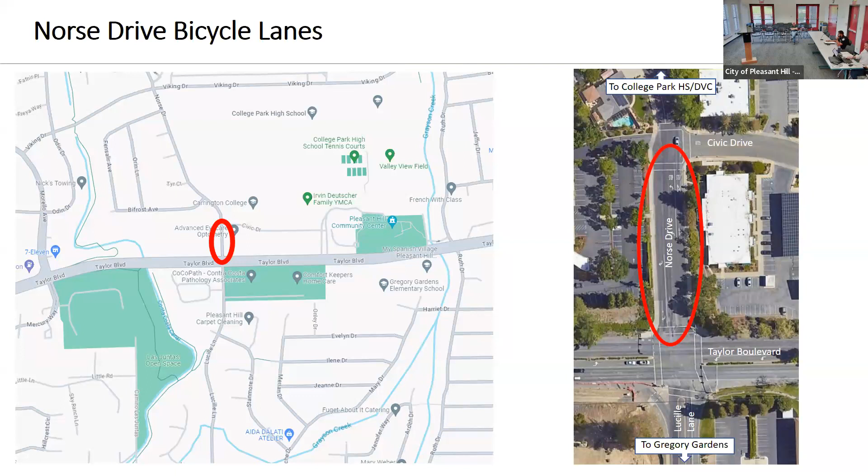So the existing cross-section today, looking north on Norse Drive immediately after Taylor Boulevard, is divided into 4 vehicle lanes: basically a right turn lane going southbound that lasts the entire length of the block, a shared through-left, and a northbound left turn lane that goes the entire block and turns into the office park. There's a signal at Taylor, and at Civic Drive it's an all-way stop, with a through lane that also goes north.

Both of the 2 outside lanes are fairly wide at 14 feet, so there is some room that we had to play with here. Looking at how this could fit a bike lane, we drew up some cross sections. This shows basically trading off the right turn lane going southbound for the left turn lane going northbound, which frees up a lot of space if we only have 3 vehicle lanes. As it approaches Taylor, it would still have a right turn lane but just a single northbound through lane, and then we can fit buffered bike lanes in there.

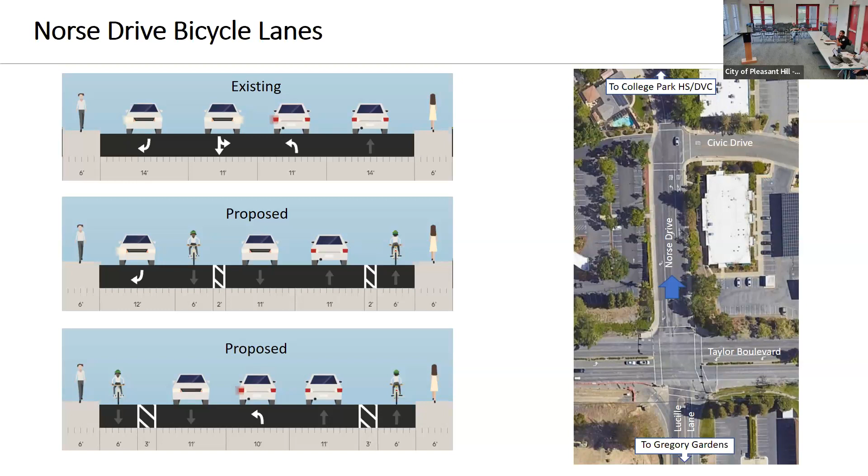As you get closer to Civic, you lose the southbound right turn lane and pick up a northbound left turn lane. Now this obviously doesn't line up perfectly, so what this ends up looking like is this -- the green highlights the bicycle path in there.

So to the left -- sorry, this just got flipped, so north is going to the right now with Civic on the right side and Taylor Boulevard on the left. This is the striping currently proposed on Lucille: a bike lane coming up to the intersection and also going southbound. It lines up pretty well across the intersection, but you can see there's only a single left turn lane going through across Taylor, so there was no reason to have 2 receiving lanes going northbound on Norse Drive.

Things shift over to still provide the left turn lane into the business at Civic Drive, but a much shorter turn pocket that's more appropriate for the amount of vehicles turning in there. Right turning vehicles onto Taylor Boulevard, coming southbound, cross over the bike lane -- again highlighting that conflict zone in green -- and then turning right onto Taylor.

So this was a layout that worked out pretty well to use up a lot of that extra vehicle space, which was a lot of excess capacity, and to get facilities in there that tie in nicely to what's happening on Lucille.

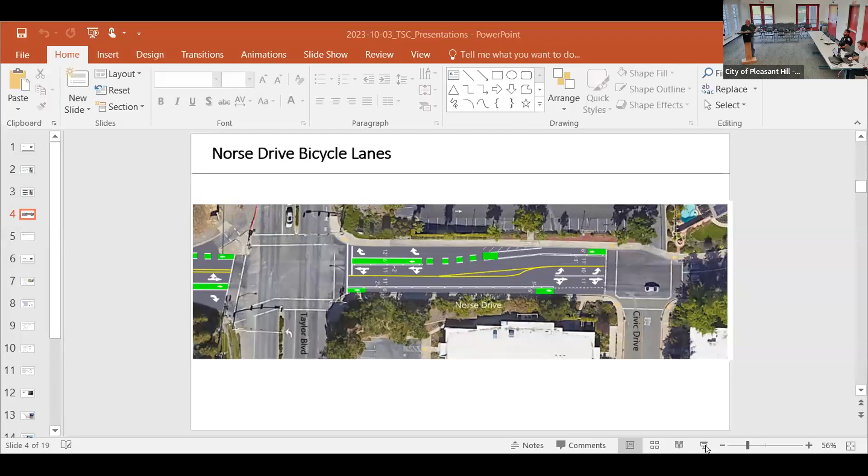Good afternoon again. I'm Jack Prosek. I was the one that submitted the overall idea of making these modifications, although, can you put that back up, please? Brian's plan here is a little bit different than what I envisioned in my mind. I'm a civil engineer, but not a traffic engineer, so.

First point is on Lucille Lane. I thought that green area zone extended across both the through and the right turn lanes in the plans for 401 Taylor. I believe in the latest plan, that's not the case. And the reason was that having it extend across the right turn lane was going to be somewhat confusing for drivers, in terms of where they should stop. I worried about that too, and that's why I made a point about the education, because you created a whole waiting zone there for bicyclists across all three lanes, according to the drawings that were approved by the planning commission and the city council. So I'm surprised to see that change.

One of the other oddball things that happens right now is because you have two northbound lanes on Norse Drive, when vehicles are turning from eastbound Taylor onto Norse, normally they should turn into the nearest lane. But all too quickly, that nearest lane turns into a left turn only lane. And in my mind, if you ever go out there and you watch, you can tell the people who have driven that route before, because they all go immediately to the right-hand lane.

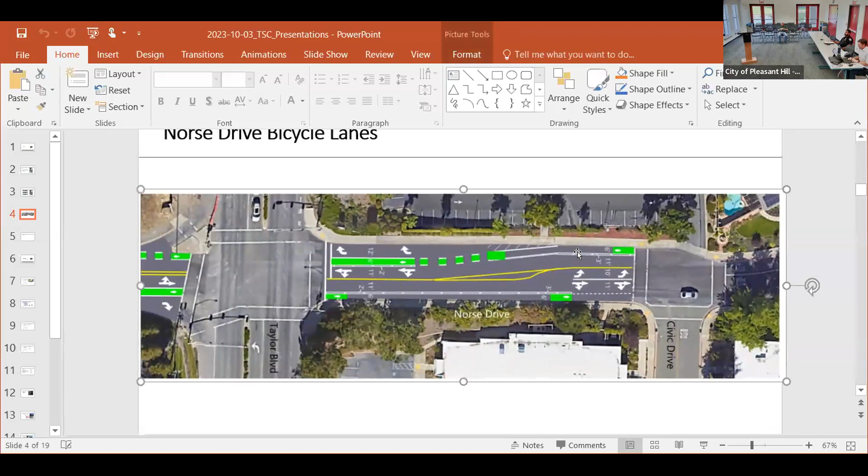One other thing just came to mind - this gentleman started talking about the bike lane. The design is, can you put that back? Sorry Ryan, I'm looking at it, and that wide green area - was that also intended for bicycles to make a left onto Taylor? I started wondering about it, because you've got bicycles that can go on the crosswalks, and then you have them there, but is that intended to make a left onto Taylor from that lane?

I'm sorry, from the - if you're heading south on, I guess that would be Norse, and most people will probably go straight to Lucille, but can you make a left from that green bike lane onto Taylor?

So technically, as a bicyclist, you have to move into the shared through-left to make a left turn, because otherwise you'll be making a left in front of potentially a through vehicle. So if there's a vehicle going through and you're trying to make a left from the bike lane, you're going to have a conflict there. You can't.

You would technically need to move into the shared through-left. Now, what we could do is a two-stage turn box, where you go across the intersection and then wait for Taylor to turn green, and then you go across Lucille, for example. So the movement would be: you come across here, there's a box right here where you wait as a bicyclist, and then you wait for Taylor to turn green, and then you can continue across. So it's a two-stage turn box.

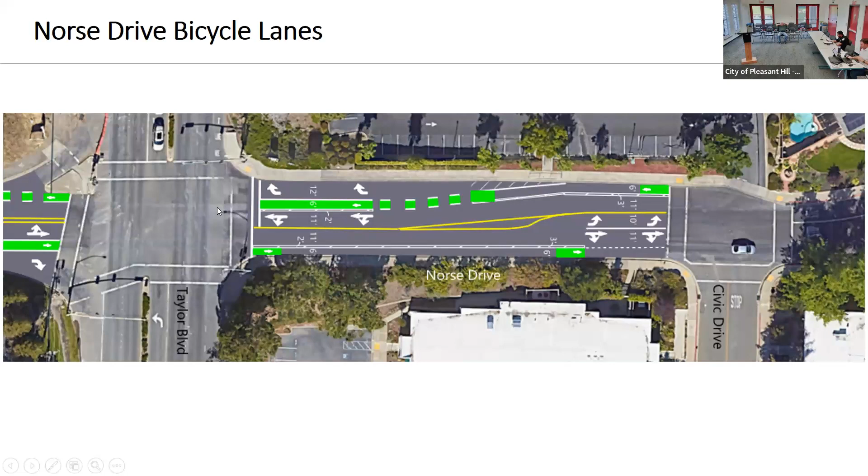So I put this on the agenda because we've been receiving a steady stream of requests and concerns related to Pleasant Hill Road, specifically between Geary Road and Oak Park Boulevard. A couple things are contributing to that. One, school is back in and there are kids going to Pleasant Hill Elementary across Pleasant Hill Road, which I'll talk about more. There was also a single vehicle crash there two or three weeks ago, where a car actually flipped in this section. So there's been more attention recently to this, so I put it on the agenda today.

I'm mostly just going to give some background on it, open it up for discussion, and then I've got some next steps in terms of what I'll be doing, looking at the road some more.

So this is the segment we're talking about, from Oak Park Boulevard down to Geary Road. It has one 90-degree curve and then the start of the curve back. For the most part it's two lanes, somewhat rural in characteristic, I'd say, due to the lack of sidewalks. Pleasant Hill Elementary, as I mentioned, is right at the intersection of Oak Park and Pleasant Hill Road, as well as the Learn and Play Montessori right next to it.

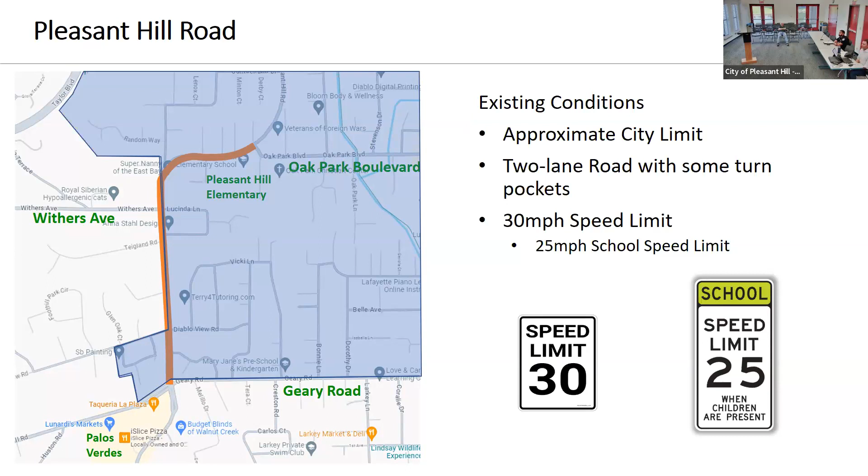Right now there's a traffic signal at Geary and Pleasant Hill Road, and an all-way stop at Oak Park and Pleasant Hill Road. In between there, it's just side street stops at the intersections. So this stretch between these two locations is uncontrolled on Pleasant Hill Road.

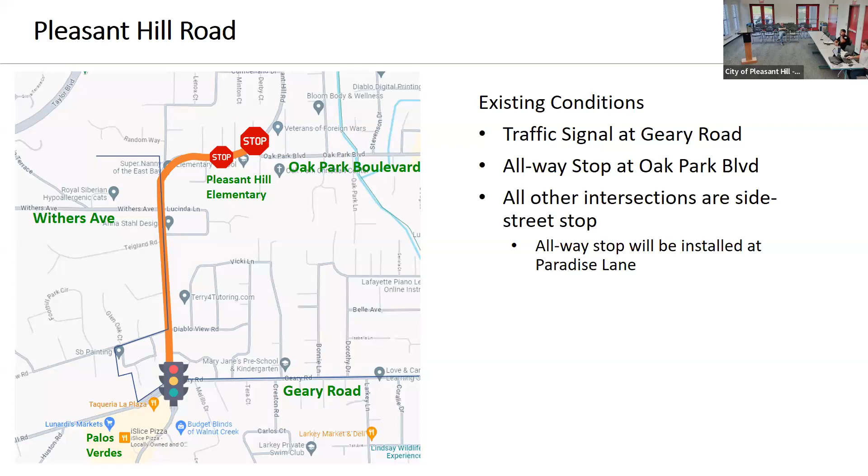But as we've talked about before, the intersection improvement project going in at the school area is putting in an all-way stop at Paradise Lane, just south of Oak Park Boulevard. The council did just approve that contract last night, so that's going to be moving forward into construction soon, probably in a two to three month timeframe.

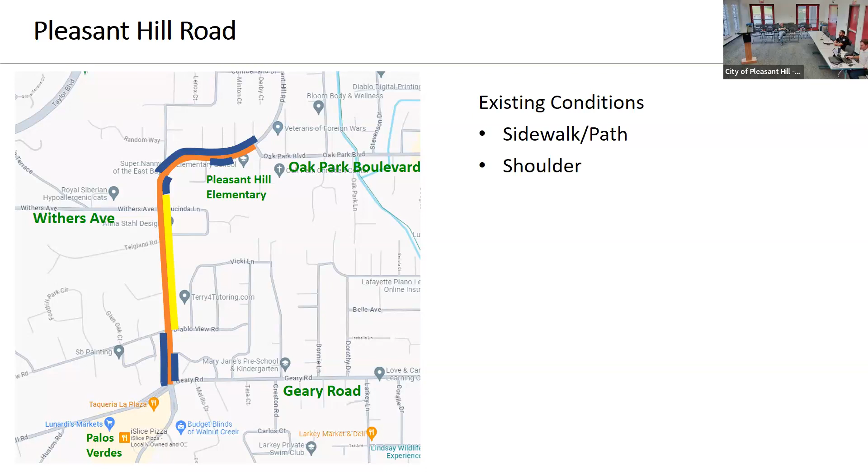And then there's currently four uncontrolled crosswalks, meaning there's not a stop or yield, or a stop or traffic signal, for Pleasant Hill Road. Those are at Diablo View Road, Tiegland Road, Withers, and Paradise. Again, Paradise is going to be changing to an all-way stop, so that dot would come off this map with that project.

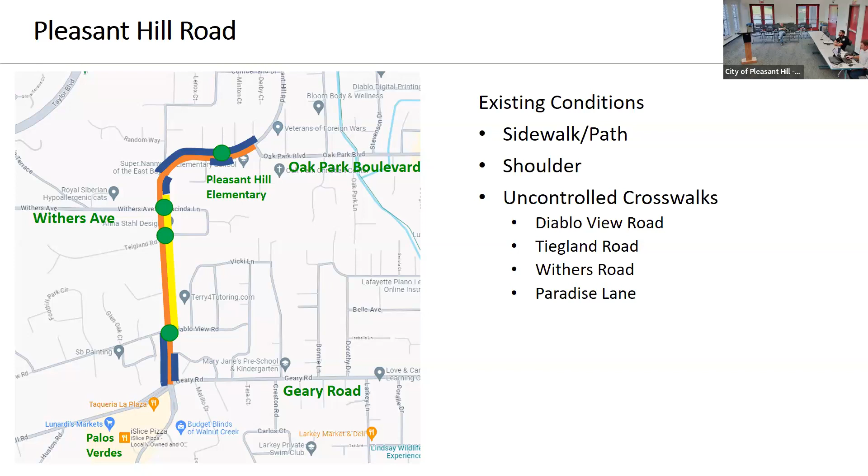There was a previous study done in 2000, so it's actually getting pretty old now. 2000 didn't used to seem like a long time ago, but I guess it is now. This was done in February 2000 and adopted by council. As I said, it's somewhat old, so some of the recommendations may have changed at this point, given that thinking around design of roads has changed a bit.

But I did want to throw up the objectives that came out of this project, because I think they still all apply: improving safety, especially around the school, keeping it at two lanes along here so it's not widened to a larger road, reducing through traffic volume, slowing traffic down, improving pedestrian and bicycle access, and improving drainage and landscaping along the roadway corridor. Those were the objectives, which I think for the most part are still the objectives I'm hearing about from the residents who messaged in.

So the big concerns that I'm hearing are vehicle speeds. Posted 30 mph, hear a lot about drivers going faster than that. And this makes it harder to cross the street. It makes it less comfortable and feel less safe walking along the streets, and also more challenging to turn into and out of intersections and driveways along there.

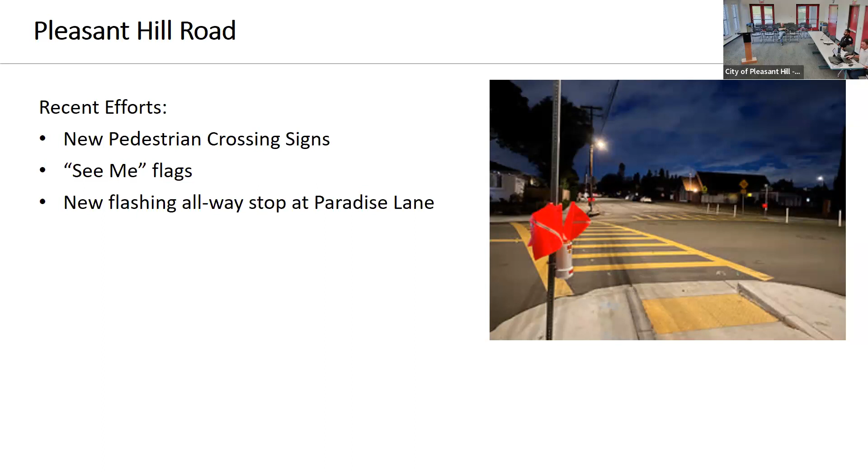And then again, new flashing all-way stop at Paradise Lane, which should go in the next couple months.

So the next steps I see for this: getting the encroachment through for those flags, going to conduct a speed survey and traffic counts. It hasn't been done for a while on this segment, so want to get new data to be reviewing. Looking at sight distance, similar to what we did for the other location on Pleasant Hill Road. And then making recommendations based on all that and looking for opportunities to fund those, because there will probably be a range of costs to implement some of that. So I will bring back the results when we have them, which potentially, at least on the speed front, could be as early as the November meeting.

So that's my presentation. Wanted to hear any feedback from you all and from the public on this to inform what we're looking at over the next couple months.

So Ryan, yeah, this is obviously really important safety issues that you're dealing with, and they're tough. I mean, the 2000 study, I see more relevance to that study from being at Pleasant Hill up from Gregory to the school possibly, or a little before, but the area between Geary and the school, I don't see it to be relevant at all.

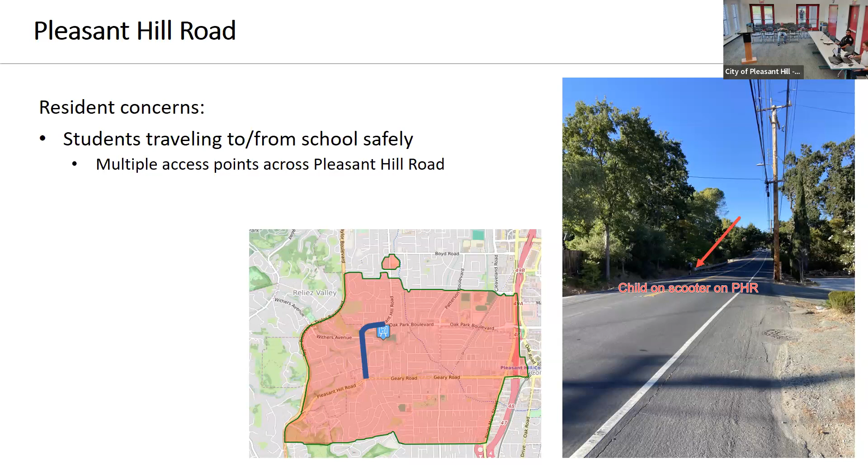If I just add one more thing, when you get to the shopping center, Palos Verdes Mall, and turn right going up towards Lafayette, you've got sort of a mini freeway effect. It's true in the other direction too, with 2 lanes coming downhill. It's a smooth surface, so you want to go fast.

But when you get to this section of Pleasant Hill Road, not only is the width variable, the surface seems quite variable too. Not in terms of potholes, but in terms of the vertical alignment. It actually drops right down with that left turn.

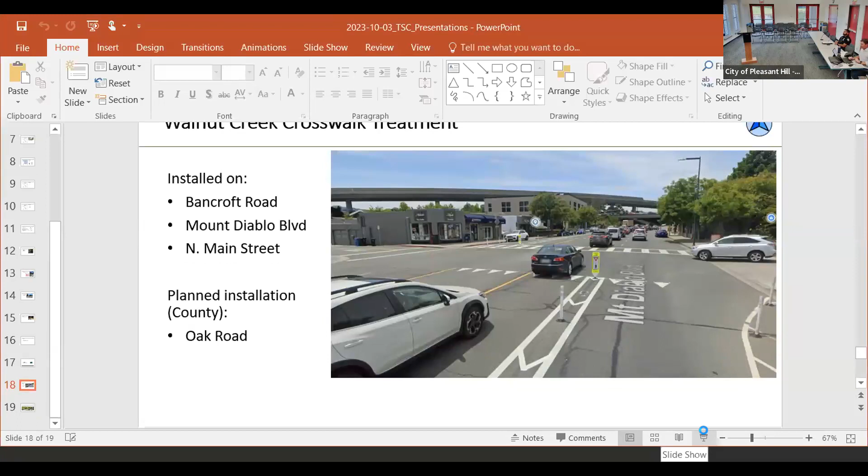There it is. So on Bancroft, Mount Diablo, and North Main Street, they put this in at all the uncontrolled crossings across, and these are all 4-lane, or 5-lane if you count the turn lane, roads with a pretty long crossing distance for pedestrians. So it includes this striping to stop drivers from passing a stopped vehicle. If one driver stops for the crosswalk, it discourages another car from passing them to get around, which is a dangerous condition for pedestrians. And then it also has these channelizers. The lanes go down to 10 feet, so it has a traffic calming effect. The whole idea is to slow down traffic and make them more aware of the pedestrian crossing.

So I reached out to the city. They don't currently have a before-after type study going, but did hear that the county is planning to install this on Oak Road, just south of Treat I believe, where there's a couple uncontrolled crossings. So they all seem to be excited with the results of it so far.

I thought about where this could go in Pleasant Hill. We actually have a pretty limited number of multi-lane uncontrolled crosswalks. So there's 2 on Gregory. One of them has the RRFB beacon, one does not. The beacon one is where there's a crossing guard, and that's getting upgraded with this latest project to add some advanced RRFBs. But that's a potential place that this could go.

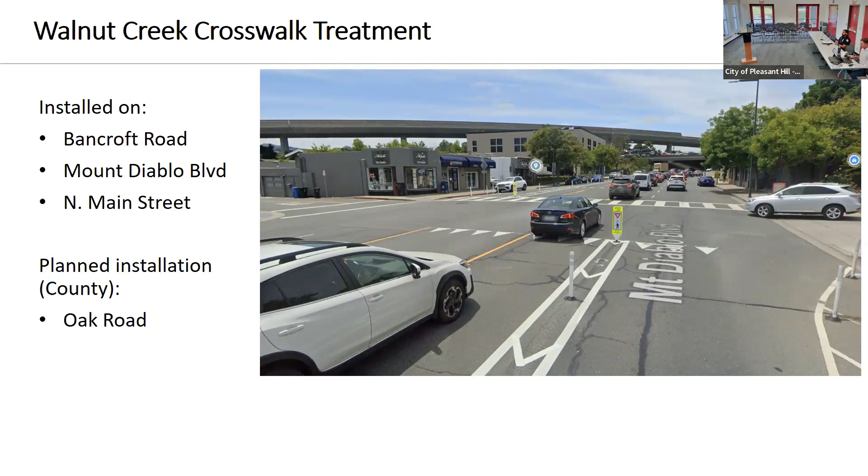Another one, also yours I think, was the Patterson Longfellow crosswalk. This is over by the Safeway shopping center, 7-Eleven.

I think you just asked about curb ramps here because there aren't any. So the challenge with bringing this up to ADA standards is we also need something on the west side there, and right now there's not any sort of sidewalk or landing. So we'd have to construct, basically I see 2 options. You could construct a sidewalk and a curb return over on that side, but there's a valley gutter going across that creates some challenges with all of that. I also looked if it would make sense to bring it to the 7-Eleven side, but the challenge there is still a similar challenge with the valley gutter. So there's some drainage stuff that would need to be worked out to make that ADA compliant.

But also it's where Patterson is now 3 lanes, so there's some additional conflict there, and it feels a little bit more in the intersection and driveways and everything. So I'm not sure that's a better place in terms of conflicts.

It's like, I wasn't even suggesting that we do any of that. It's just that we have a non-conforming, non-compliant situation, and there you have assisted care facilities right here, and I see people trying to cross that street over there, and they're confused, wheelchairs and stuff. I don't know, maybe get rid of it. I don't even know what the solution is, but it's definitely strange.

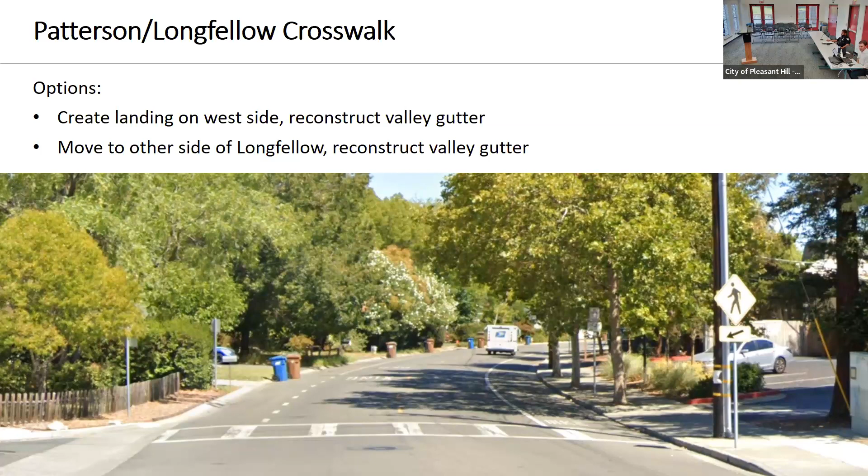I think we're on to commissioner and liaison comments, which I can start if you'll allow me. I just had a couple other updates I wanted to give.

So last time we talked about the no parking on Pleasant Hill Road at the one spot. Wanted to give you an update on that. The sign is in, so no parking installed there. And then the other one was the intersection of Santa Monica and Santa Lucia, where we talked about adding in the yield control there, and that is also in. So we're able to knock out a few of those things pretty quickly.

So always nice to be able to do that. And then an update just on the bike ped plan. It's going through some revisions based on the planning commission meeting and comments that were heard then. And then we'll go back to planning commission once those are ready, hopefully by November. I had a goal of end of the year, not of getting the whole thing adopted. We're running out of time. But it is in progress still. Just wanted to give you an update on that.

So in fact, you've worked both sides of that plan, right? Well, never as a consultant, but as the chair and traffic safety sitting on commission, this side of it. Yes. Interesting, yes. Maybe you can incorporate some of the concerns that you had as a commissioner. Enough for me.